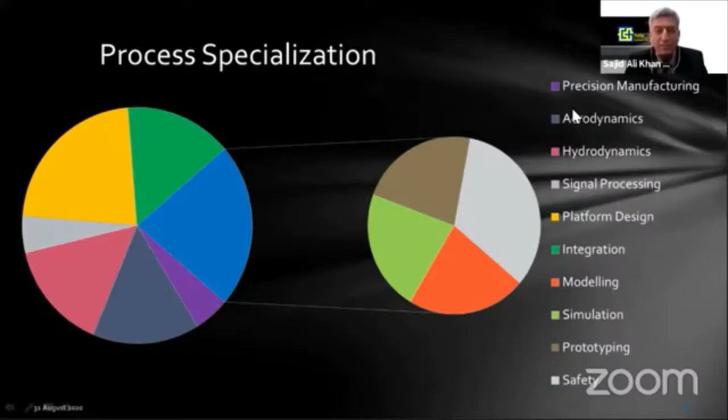We have some process specializations because we involve precision manufacturing, as I told. We develop our expertise in aerodynamics, hydrodynamics, signal processing, platform design, integration, modeling, simulation, prototyping, and in the end, but a major part is in the safety of all these systems.

Now, next you will see the human resource experts we have. With us, we have aerospace experts, combustion experts, avionics experts, mechatronics, automation experts. In the end, we have those who are trade experts doing the diplomas.

Now, coming to your second part, how I started this process of aerospace despite being in the Navy and serving in submarines. In fact, I started my career as an aeronautical engineer, but somehow a turn of events took me to the Navy, and eventually I ended up getting commission in Pakistan Navy, and then joining submarine service.

The submarine service itself is a cutting-edge technology. So in a way, I'm working at the moment on 2 extreme technologies, aerospace and submarines. Rest in between are mediocre technologies in that sense.

And your question about how I came into developing these gas turbines and everything - our study did not start all of a sudden. We have a team who have been working for quite some time, but in their own capacities, in gas turbine technologies or aerospace technologies. Our main effort was to bring them onto one platform under SoluNox.

My next question will be more specifically about what micro gas turbines are. Can you please explain it for the interest of the audience who are laymen, and for someone who has a bit of knowledge about these systems? Can you also throw some light on the manufacturing process as well?

I'm sure all experienced from the aerospace are sitting here, and somehow, as you said, maybe some those who are not related to this technology or engineering background. Basically, a gas turbine is a heat engine with a continuous flow. In comparison, reciprocating engines use pulsating flows.

These engines have a compressor, a turbine, and a combustion chamber, where heat can be applied in different modes through fuel injection, and new methods are coming for adding heat to the combustion chamber. In this type of engine, generally they are mounted on the same shaft. Micro gas turbines generally are mounted on the same shaft, and that is why they are popular in this part of the world of aerospace.

At the moment, there is no standard definition of micro gas turbine. Initially it was considered that under 1 megawatt would be a micro gas turbine, but subsequently this definition kept on being worked out by many engineering associations and countries. So at the moment, under 400 kilowatt turbine is graded as a micro gas turbine.

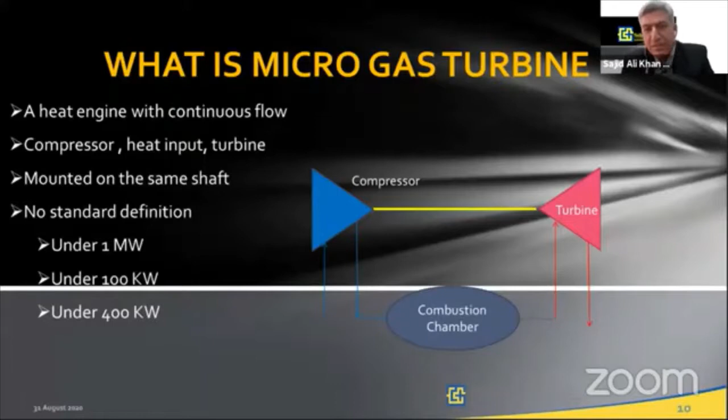And these micro gas turbines, you can see in the process cycle. This is the Brayton cycle. It follows a Brayton cycle.

In this process, the compressor raises the air pressure, and from process 1 to 2, if it is visible to you, it is directed to the combustion chamber, where heat is added via fuel combustion through a heat exchanger or concentrated solar power. Heat is added, and then again in the turbine, at process 3 to 4, you can see the expansion in the turbine takes place to produce power.

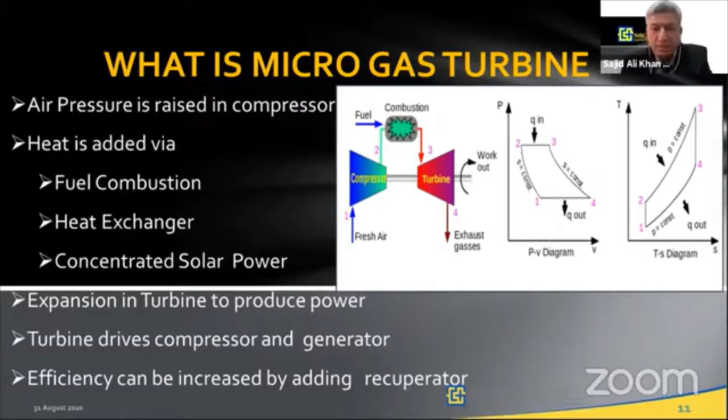This turbine drives the compressor and generator, and the efficiency of these turbines can be increased by a recuperator like this on the return cycle, to increase the temperature in the combustion chamber so that economy of fuel can be achieved.

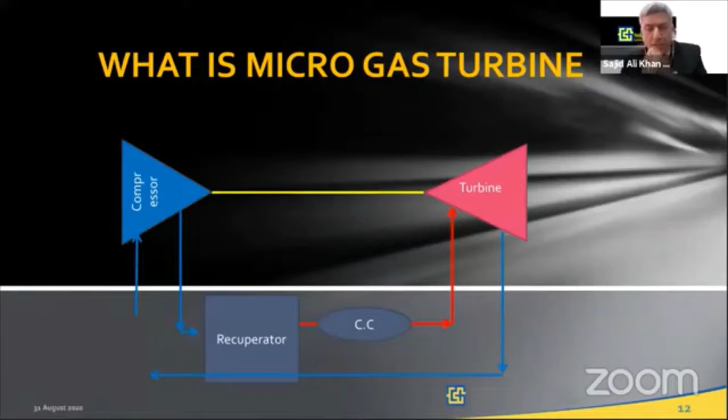Now some of the historic perspective related to micro gas turbine. As I said during my presentation, the development started in the 1980s. It is not a new subject basically, but the drive for this development was the automotive industry, because at that time the automotive industry was looking for an alternate for reciprocating engines, mainly because of fuel flexibility, reliability, and low emissions in micro gas turbines. However, at that time, for some reason this did not get attraction.

But again in the 1990s, use of high-speed generators evolved, and interest also developed in hybrid vehicles, and it was considered suitable for these hybrid vehicles. Subsequently, the concept was again picked up by decentralized power in 2014, when the European Union and UNFCCC declared some standards for low emissions in the atmosphere.

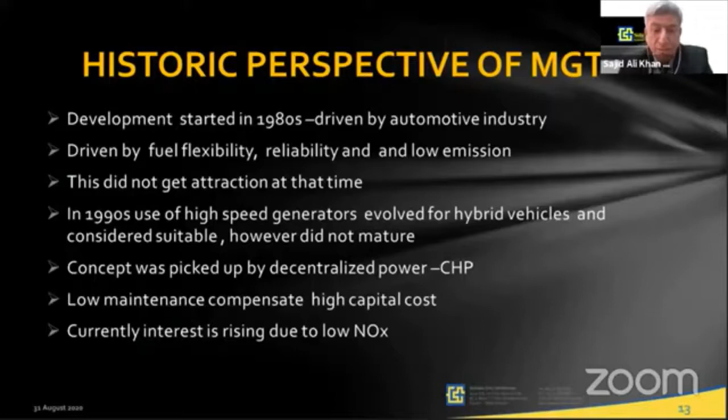The important part of these micro gas turbines is they have low maintenance and compensate for high capital cost. Currently, interest is rising due to low NOx in this gas turbine, and interest is developing now.

So the first design process starts from the Brayton cycle, and in this process various elements of gas turbine design are finalized, generally mass flow and the temperature ranges at different stations in the gas turbine. At the same time, the selection of material is also done. Again, just for repetition, it is an iterative process, and a continuous back and forth movement between the designer and the end user goes on till the time a suitable compromise is reached.

It undergoes an iterative process during the design, and then engine control units which control the complete process, because these gas turbines cannot be controlled manually for sure. So to make them smart and efficient, these engine control units are becoming more smarter now.

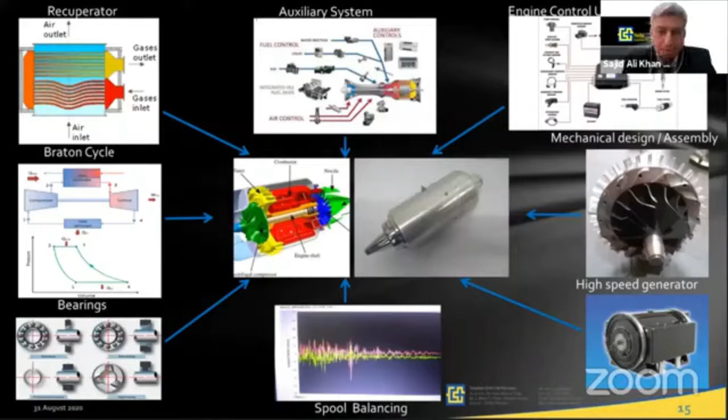Okay, now let's move to some of the parts which we manufacture in our facility.

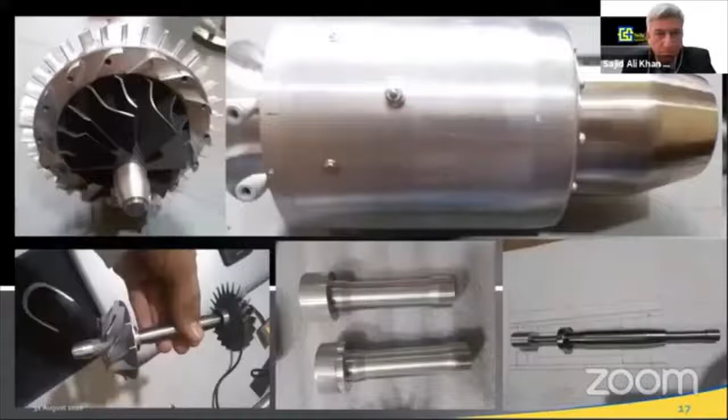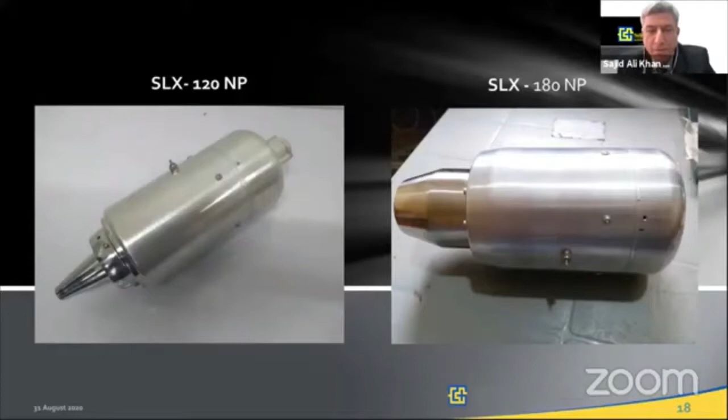These are two versions, SLX 120 NP and SLX 180 NP. They are 120 Newton and 180 Newton respectively. Our research is continuing, and we have plans to further improve these systems for relatively higher powers.

Can I have a quick interruption here? Hello? Yeah, okay. The parts you just showed, are they designed by you and manufactured in Pakistan? Yep, yep. So I was seeing in your last slide, you said the bearing and the generator is running about 1,000... so how do you actually manage it? Because I didn't see it. You're not using any kind of actuators, you're not using any kind of balancing devices. So how could you be so sure that these bearings and the generator running at that high RPM will not destroy each other?

You'll see our video running, okay. These technologies are already matured enough. We also have a running engine, so our team has, mashallah, done enough good job on this — they can control this.

So you are not using any kind of actuators in this process? No, correct. No, okay. It is a thermal cycle.

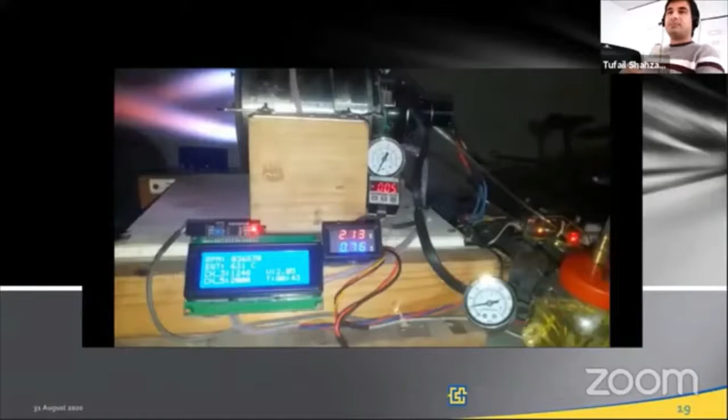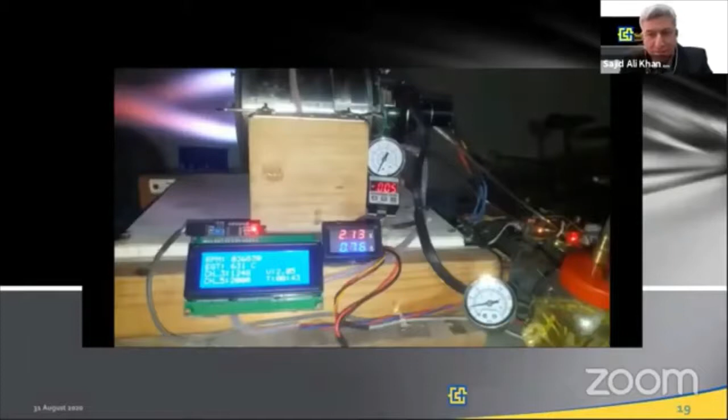Okay, thanks. Yep, so this is one of the pictures taken during a test conducted, and it is a running engine. You can maybe see the RPMs and the temperature in the digital display of this picture. And this is just the startup, it's not full power. Okay, may I move now? Next.

Now coming to technical specifications. We have developed 120 Newton and 180 Newton, and according to our studies, we are planning to go to 800 Newton in the near future. We can have electrical output from 3 to 500 kilowatts electrical, and thermal output from 3 to 1500 kilowatts thermal, with exhaust gas temperature up to 850 degrees centigrade.

We have fuel flexibility of using natural gas, sour gas, gasoline, kerosene, diesel fuel, biofuels, etc. We are targeting electrical efficiency from 23 to 40%, whereas total efficiency in CHP mode is from 80 to 90%.

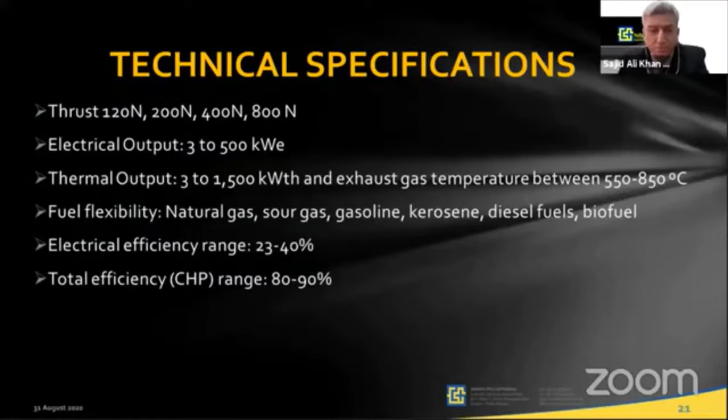Reliability and life: these turbines have been designed to work 40,000 to 80,000 hours with overhaul. Emission targeting is below 3 ppm for NOx on fossil fuels comparatively — this will be our range. And the noise level we are maintaining is 50 dBA.

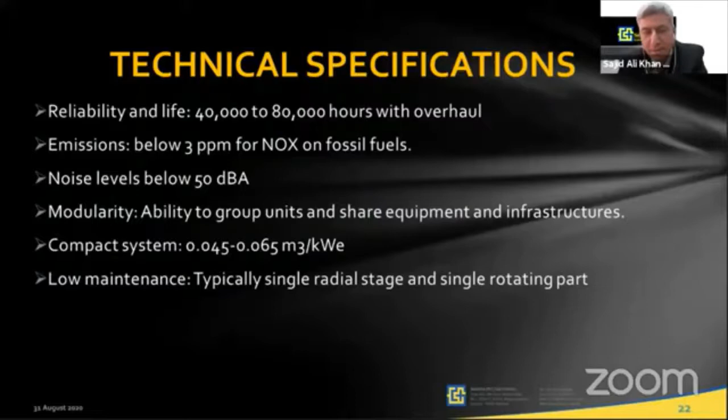These turbines are modular, and the infrastructure is also very modular, easily workable for maintenance. It's a compact system, 0.045 to 0.065 cubic meter per kilowatt electrical. These turbines are low maintenance, with a typical single radial stage and single rotating part — no moving parts. You'll see later in the technologies which type of bearings are used; there is no lubrication also.

Reliability is high because there are very few parts involved in this gas turbine, so it is very reliable and robust. Compactness comes from the high energy density, use of high-speed generators, and the turbine itself being a very small, compact system, able to develop modular power up to 50 kilowatts. You can stack various modules to develop power in multiples of 50 kilowatts.

These have fuel flexibility, and diverse fuels can be used, from jet fuel to diesel and biofuel. This is the most interesting part in the European Union at the moment, trying to use biofuels. At the same time, their NOx emissions are very low, so even on diesel they are considered very low.

Another application, for the audience, is CSP, concentrated solar power. In this application, a dish is used to direct the sun's energy onto the combustion chamber to give heat to the turbine. These are low emission turbines, with low NOx compared to reciprocating engines.

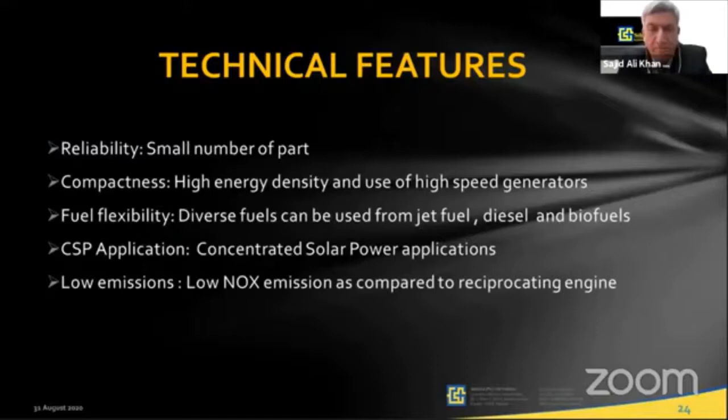That is one of the reasons why the European Union and the world are moving towards micro gas turbines, even in renewable energy solutions. They are low noise; the combustion noise is very low compared to reciprocating engines. These are very high frequency noise, which can be attenuated relatively easily, and they have lower vibrations compared to reciprocating engines.

CHP mode can be used for high heat and low electrical power. It depends, because in this mode you can choose between the two - whether you want more heat load or more electrical load. You can adjust accordingly to meet the requirement of the end user.

Another application is integration with fuel cells. In integration with fuel cell, the byproduct heat is used to heat the solid fuel used in the fuel cell.

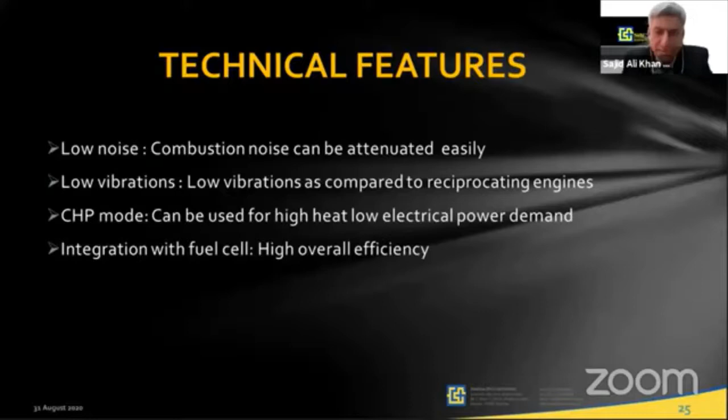The applications include combined heat and power, combined heat and cooling, and heat and power for domestic and industrial uses, as well as automotive range extenders. In hybrid vehicles, batteries were not considered enough for long endurance, so micro gas turbines are being used to enhance the range of hybrid vehicles. In future, these are going to be used in Europe for train and rail transport.

In the oil and gas sector, preventing flaring is important, as normally gas is continuously vented into the atmosphere. The European Union has banned this venting of flare into the atmosphere, so micro gas turbines are being used to produce heat and electricity using that gas. So this is another application.

Concentrated solar power, as I said, uses solar power to concentrate heat on a combustion chamber, combining solar energy and gas turbine.

One of the popular uses is small UAVs and APUs, another area where these micro gas turbines can be used. Again, due to their minimum size, these are being adopted as backup power energy instead of using batteries with renewable energy plants.

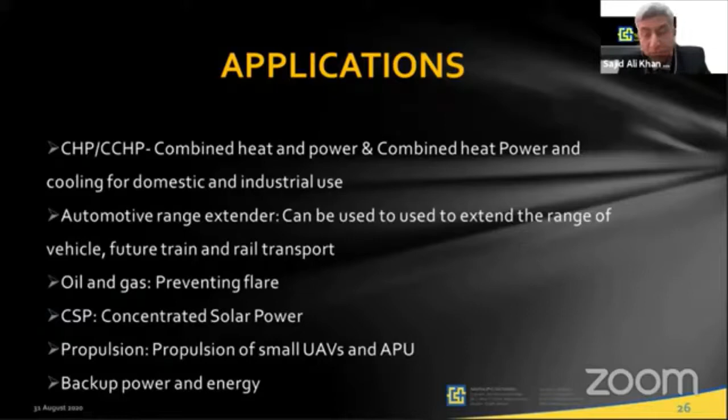So you've spoken about the micro gas turbines. What other products is your company actually working on that have export level potential?

My next few slides would indicate some pictorial views so that you can have an idea what we are actually developing beside this range - a high-speed target drone launching system.

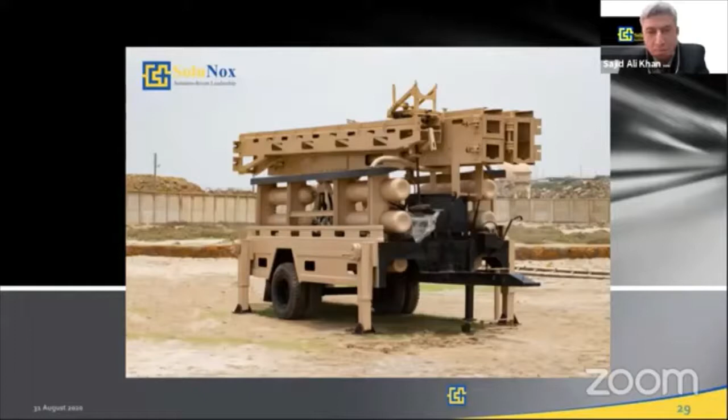This is the system which has been designed and developed in Pakistan. The picture you are seeing at the moment is the transport mode, in the folded state where it can be transported. In the next slide, you will see the deployed state. The system is shown in deployed state.

The system has the capability to launch masses up to 150 kg with a speed of 55 meters per second. The weight of the launcher is 5,500 kg, easily deployable with 16 meter length, and it has a transportable length of 6 meters, so it can be easily transported in a 20 feet container. This is operated with high pressure air, 150 bar, and can be deployed at sea and on land.

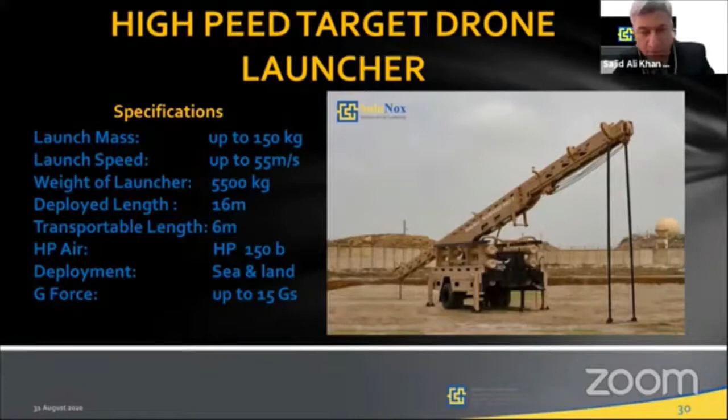This system can launch and deploy UAVs with force up to 15 Gs, controllable using our system.

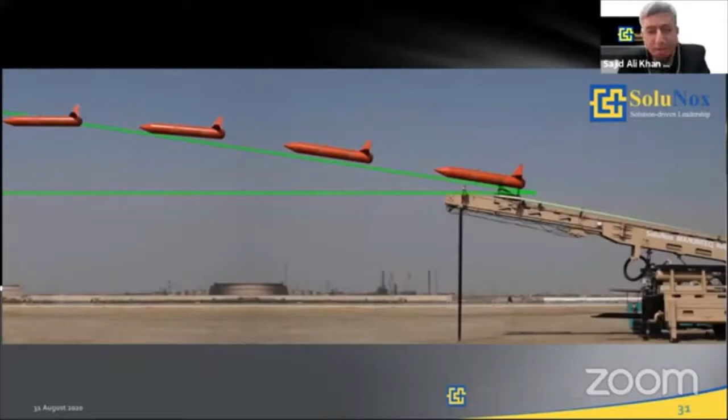This is another picture of a dummy being launched with power, just to show how much energy this system has got.

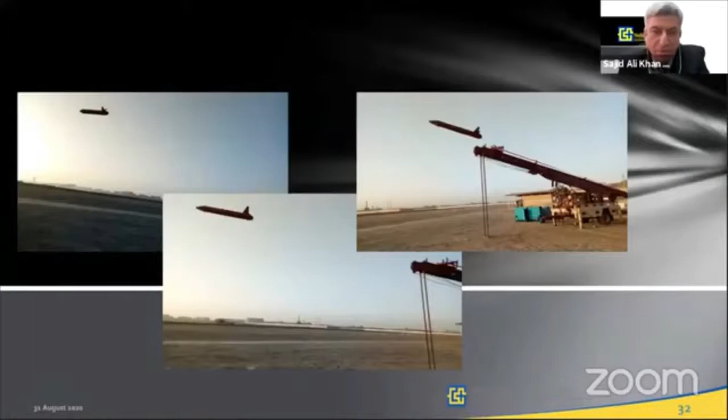We are now in high-speed target drone systems for training of pilots and for various commercial uses. It's a high-powered system, can go up to 0.4 Mach, and this system has been designed for being used with our launcher.

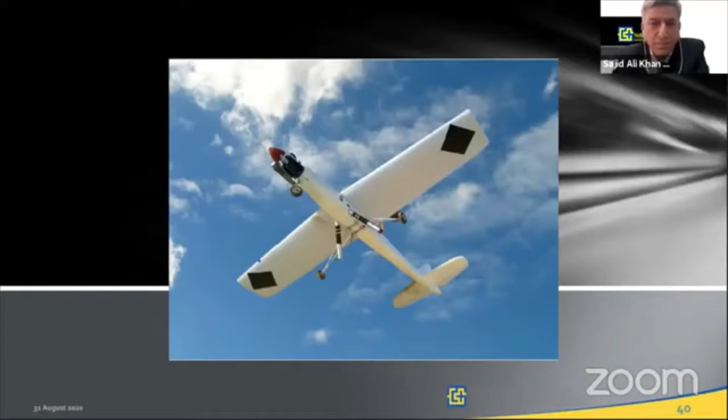And this is one of the UAVs, for smaller low-speed system for IR tracking system. This is conventional wings, developed by us, for carrying small payload capacities for aerial videos or pictures of a disaster area.

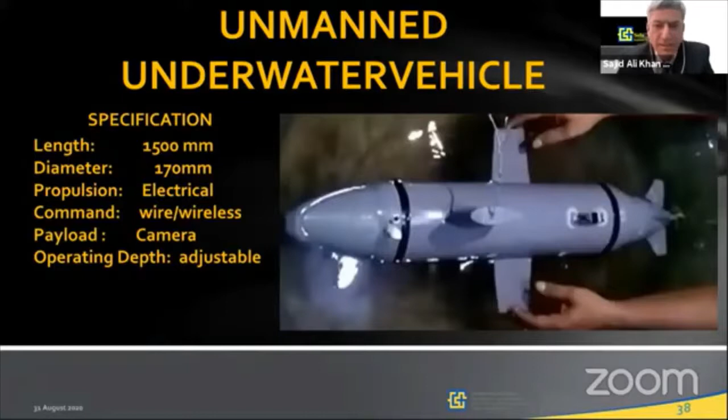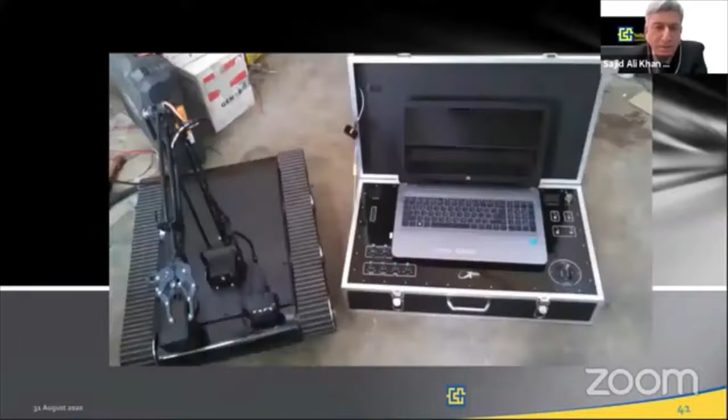This is another unmanned ground vehicle, a robot manufactured at our facility. This is autonomous, it also has a camera for surveying and other activities. It can manually handle and pick up things during disaster survey of a damaged area during fire or flooding. This autonomous robot can give feedback to the end user, to the system.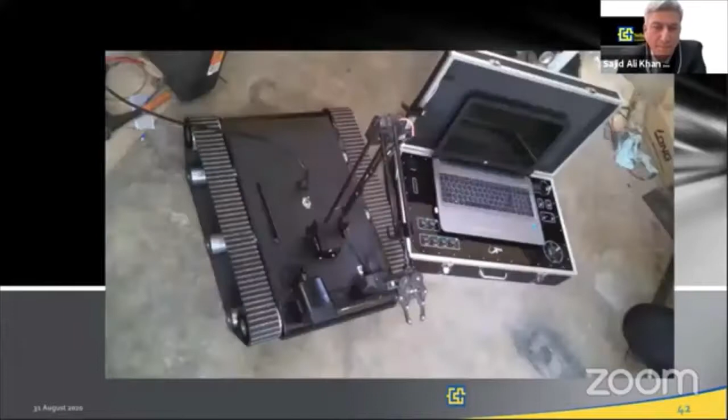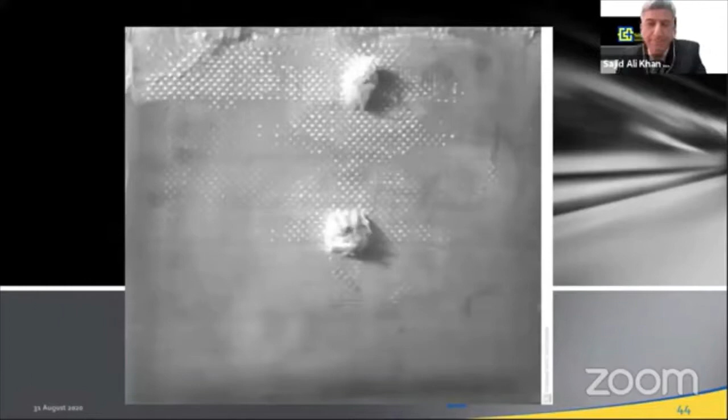High strength materials, these are the lightweight, high strength materials being developed. Research was done and alhamdulillah we have developed, and now you can see armour to protect against high energy bullets, developed locally. You can see how the bullet has been prevented. This is the front end.

We are into some precision manufacturing. We develop connectors, you can imagine the accuracy required for these type of connectors.

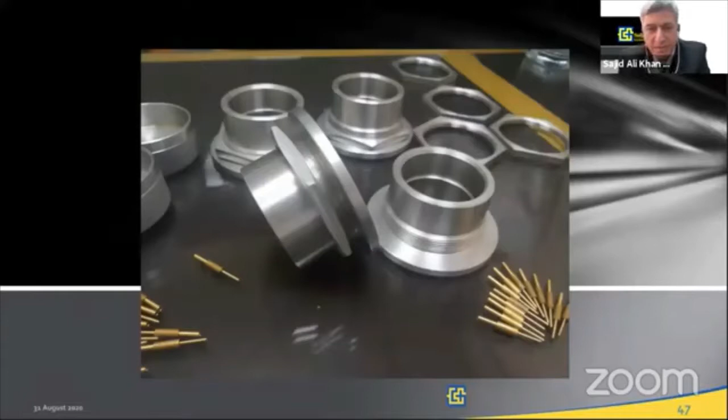I would like to ask basically, what is the potential market you see for all your products, and what are the export capabilities?

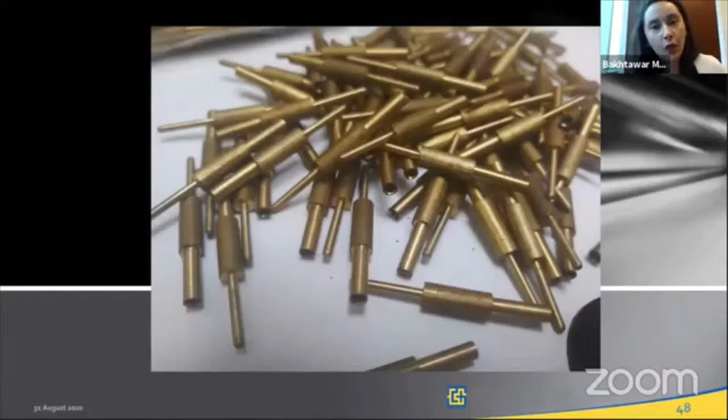Frankly, we are at the moment targeting Central and Eastern Europe, Canada, South Asia, ASEAN, Gulf, Central Asian countries, and some African countries have shown interest, and Pakistan of course. These countries have shown interest, and for this we have participated in a few exhibitions also, so we have seen quite a good encouraging response from these countries.

Yes, and the export capabilities we have, like all our products, micro gas turbine, high-speed launching systems, automatic disarming system—this I have not displayed here, we may show you a video for this system. This system can disarm ammunition which is expired, can be dismantled automatically.

Our high strength materials' results were very encouraging, with some companies showing interest for bulletproof jackets and materials, and high performance actuators for pneumatic systems. And in automobile industry, we have some offshoot technologies coming out of these products applicable in automotive industry.

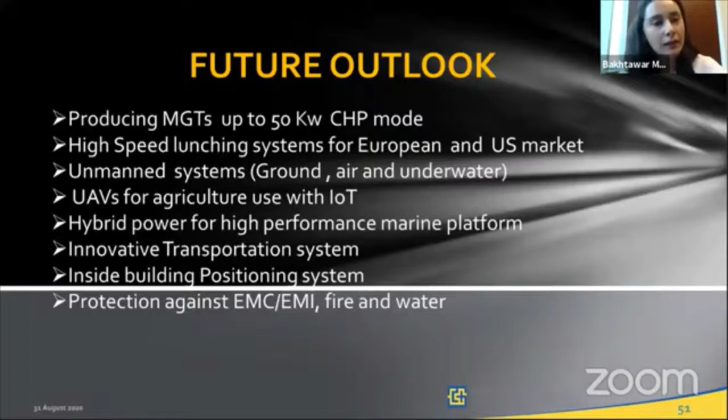Frankly, in the future outlook, we see raising the capacity of these micro gas turbines, and in the CHP mode, because this is going to be the future of the world. Maybe in Pakistan it may take some time to come to this level, but Europe and the Americas are focusing on it, even Japan is focusing on these technologies.

So we are targeting these countries, and that is why we have developed our trajectory towards these technologies. We have high-speed launching systems for European and US markets, and unmanned systems from ground, air, and underwater. We have UAVs for agriculture used with IoT, and we are targeting hybrid power for high-performance marine platforms, innovative transportation systems, inside building positioning systems, and protection against EMC, EMI, fire and water. These are few areas of the offshoot technologies from our research done so far.

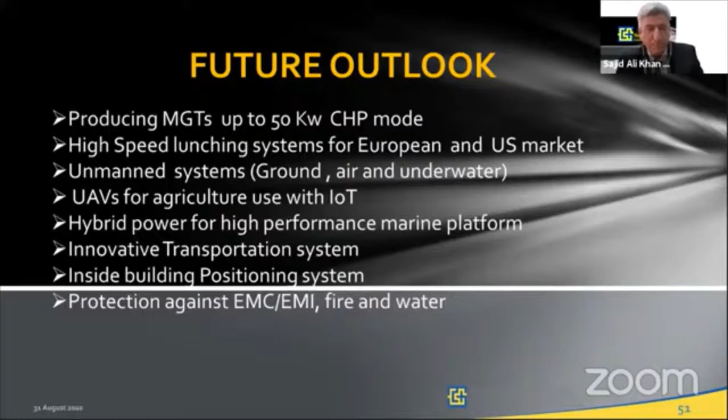Moving towards the end of my question regarding the presentation: how can the government of Pakistan help SoluNox, and what examples exist in other countries for supporting such technologies?

In fact, SoluNox research is ready to lead Pakistan towards cutting-edge technologies in the power and energy domain. This entire effort is exactly aligned with government vision. So we expect, since we are already aligned, that the Pakistani administration may develop this understanding of low emission or low NOx and other areas. They may like to come up at later stages, but at the moment we at SoluNox have developed future technologies in this time period.

So what we are expecting from government or public sector organizations, if they want to avail our expertise in these technologies, we are ready to give our expertise gained so far, and help develop this ecosystem in Pakistan. Importantly, this ecosystem should be beneficial for both parties. As a private entity, we have used all our own resources. Even the European Union invested 1.6 million euros just for a study on gas turbines, whereas SoluNox used its own resources to reach this level. We would like to do business, of course for profit, since we have accomplished so much. We are also ready to extend our services to academia for training university students and tradesmen.

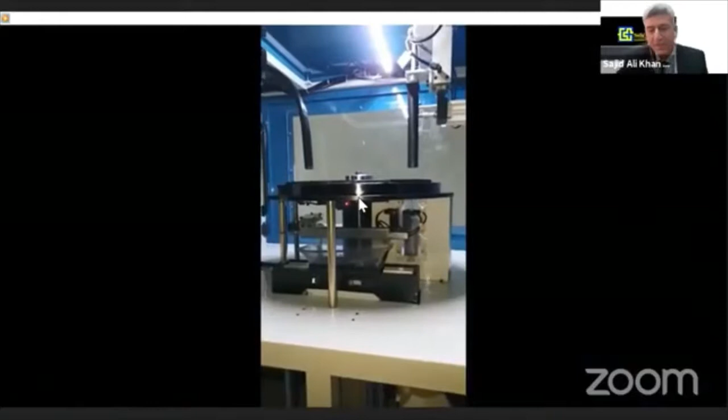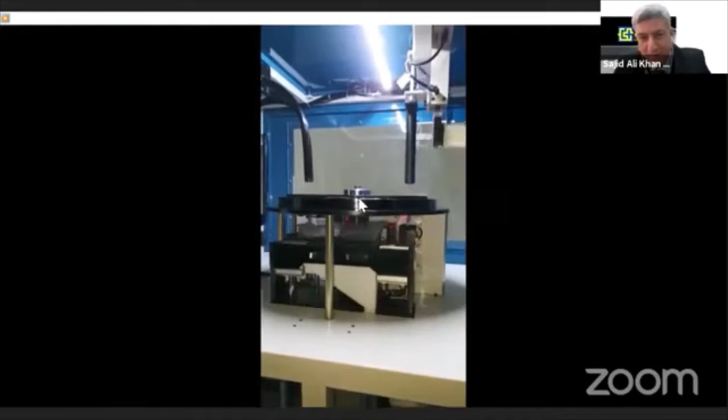This is one product which we did not discuss in the presentation. This is an automatic system, totally designed and manufactured by our young, talented engineers. This system dismantles expired ammunition automatically with just the click of a button.

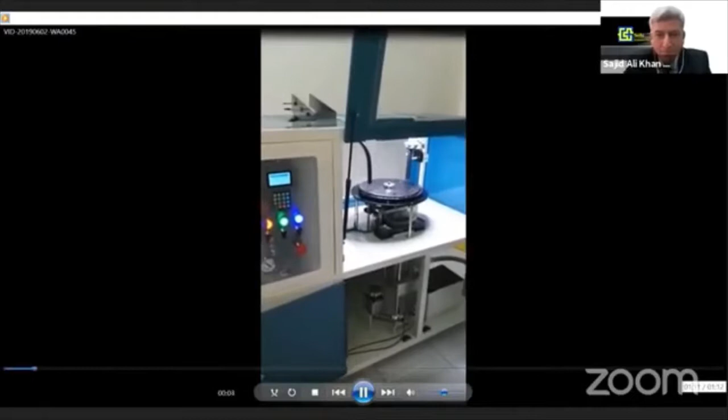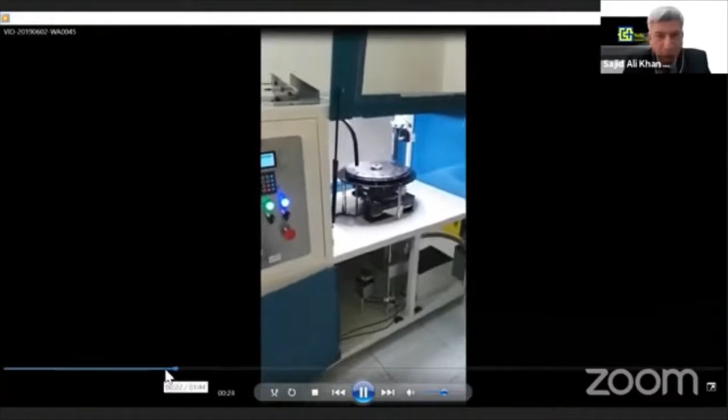So is this the same device that you were showing us? Sorry, is this the same instrument? Same, yeah.

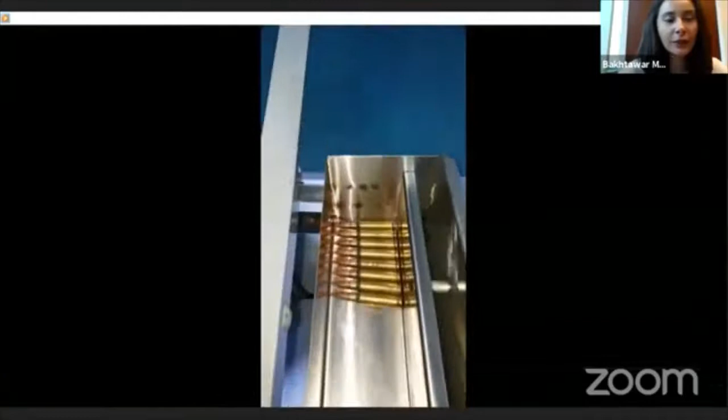Maybe you can go to the next video.